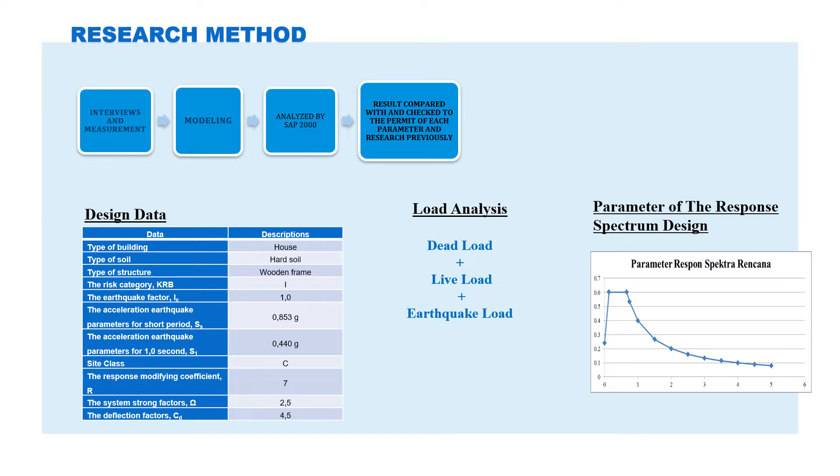From the data below, these are the SAP 2000 data. There is design data, load analysis, and the parameters of the response spectrum design.

In this paper, we focus on the traditional house of the Karo ethnic because the research for the Toba ethnic has been presented previously. So this is the Karo traditional house. We can see here the elements of the structure: first the roofs, then the column, and then the foundation and also the condition of the stone pedestal.

On the right, we can see the perspective of the cross-section and longitudinal section. And below, we can see the structural frame models that will be analyzed by the SAP 2000 software.

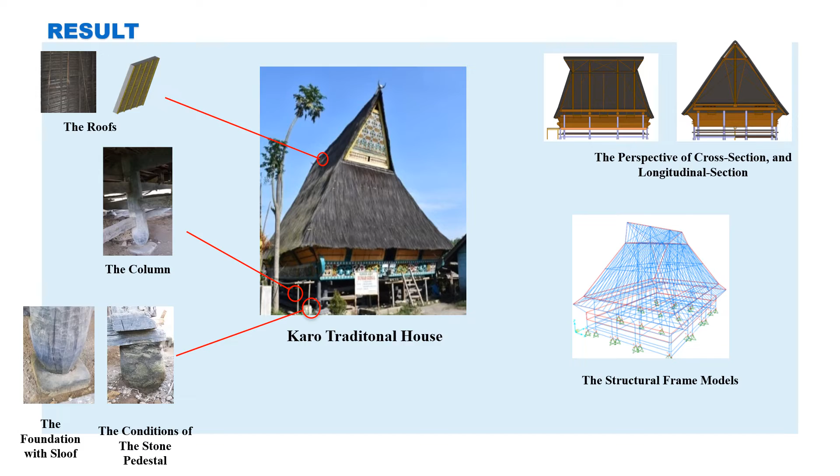This is the result from the analysis. First, the horizontal irregularity. The location of the center of mass and stiffness in the Karo traditional house in Lingga village is shown in the table aside. The center of mass and the center of stiffness have the same coordinates. It means that there is no eccentricity and no torsion that occurs in the structure, so the structure is symmetrical.

The second table is the analysis result of the horizontal irregularity of the Karo traditional house. Furthermore, there was no discontinuity, neither the diaphragm nor the lateral force trajectory in the structure. The columns and the walls are positioned continuously, and the vertical lateral force resisting element is parallel to the orthogonal axis of the earthquake force bearing system, so there is no horizontal irregularity in the structure of the Karo traditional house.

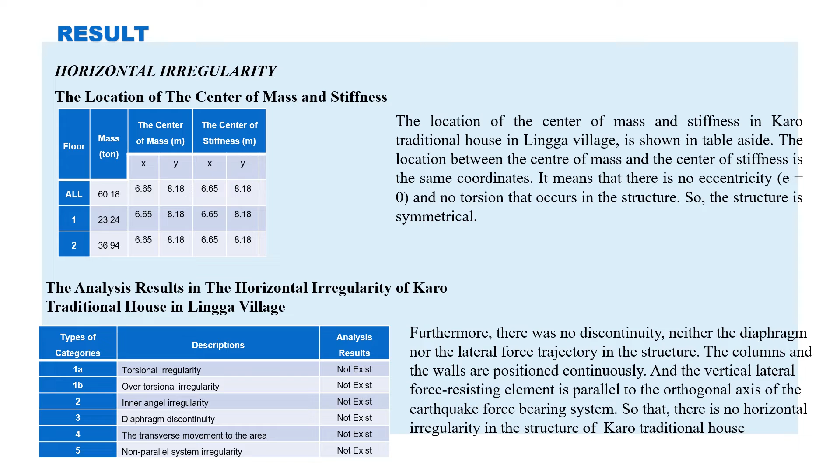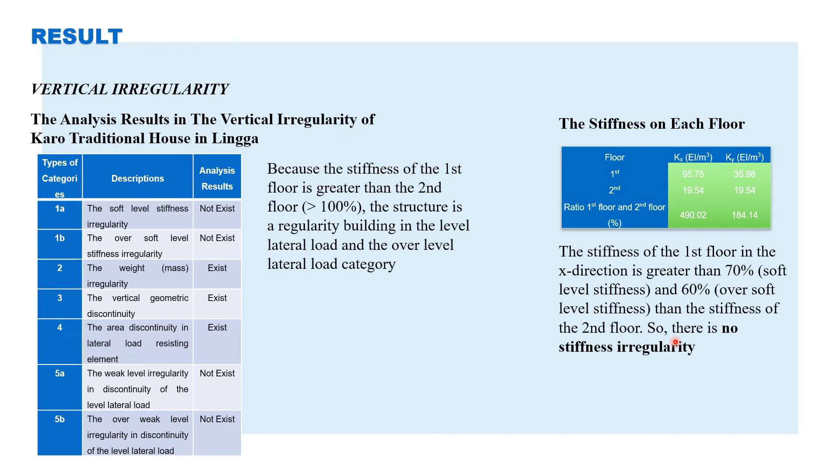Next is the vertical irregularity. The table for the vertical irregularity is shown below, the analysis result of the vertical irregularity of the Karo traditional house. Because the stiffness of the first floor is greater than the second floor, the structure is a regular building in the level lateral load and over level lateral load category. And the stiffness of the first floor in the x direction is greater than 70% and 60% of the stiffness of the second floor, so there is no stiffness irregularity.

For the structural period T, the table aside shows that the value of the period is smaller than the permit period of the structures, so the house is safe. Aside from that, the period in Karo is smaller than the period in Toba, but the natural frequency in Toba is smaller than the natural frequency in Karo.

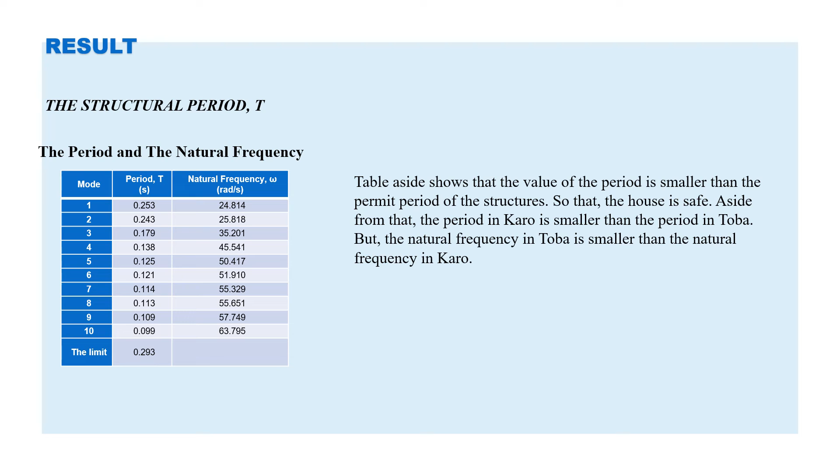The base shear force nominal V. The result of the dynamic shear force analysis must not be less than 85% of the static shear force obtained. The base shear force of the structure is analyzed by SAP 2000, and it shows that the traditional house structures in Karo and Toba villages are safe.

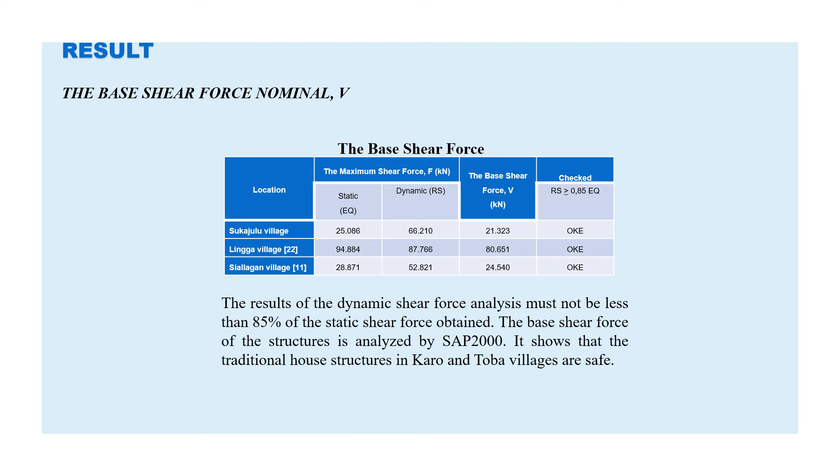For the friction force F, the shear force F will be held by the static friction between rocks and wooden poles. The static friction depends on the normal force and the static coefficient of friction. The friction force of the structures is analyzed. The table above shows that the traditional houses in Karo and Toba do not experience movement because the maximum static shear force is smaller than the static friction force.

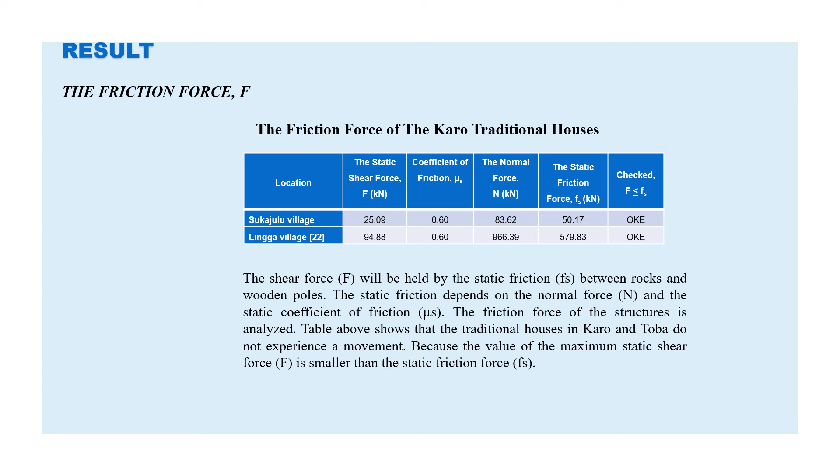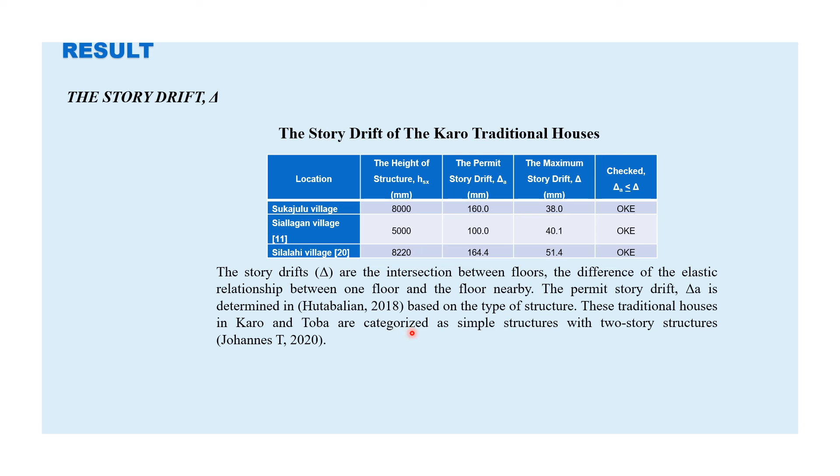The story drift delta. The story drift is the difference of the elastic displacement between one floor and the floor nearby. The permit story drift delta A is determined in Hutabalian 2018 based on the type of structure. These traditional houses in Karo and Toba are categorized as simple structures with two-story structures.

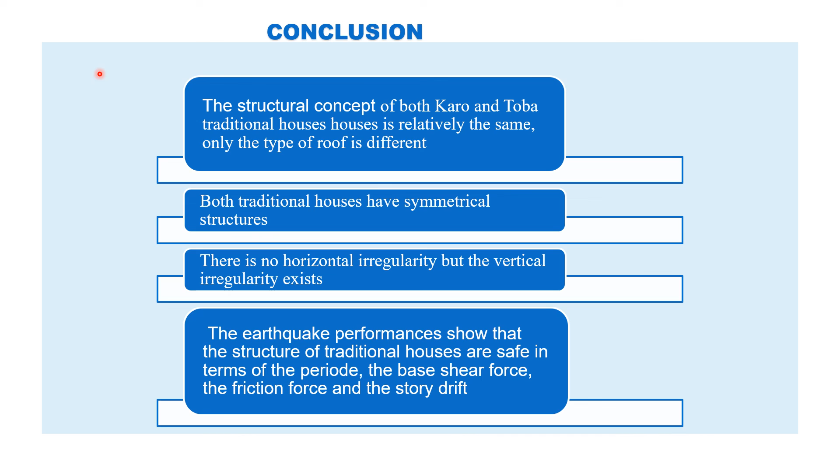Let's proceed to the last page. Conclusion. The structural concept of both Karo and Toba traditional houses is relatively the same, only the type of roof is different. Both traditional houses have symmetrical structures. There is no horizontal irregularity, but vertical irregularity exists. The earthquake performance shows that the structures of the traditional houses are safe in terms of the period, the base shear force, the friction force, and the story drift.